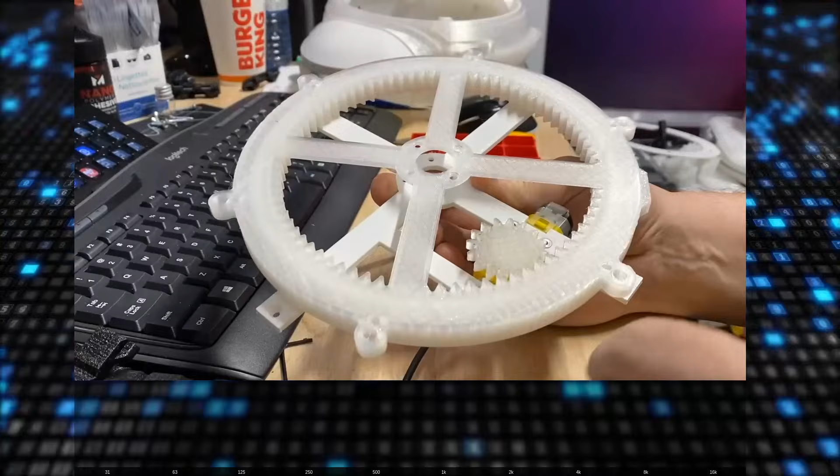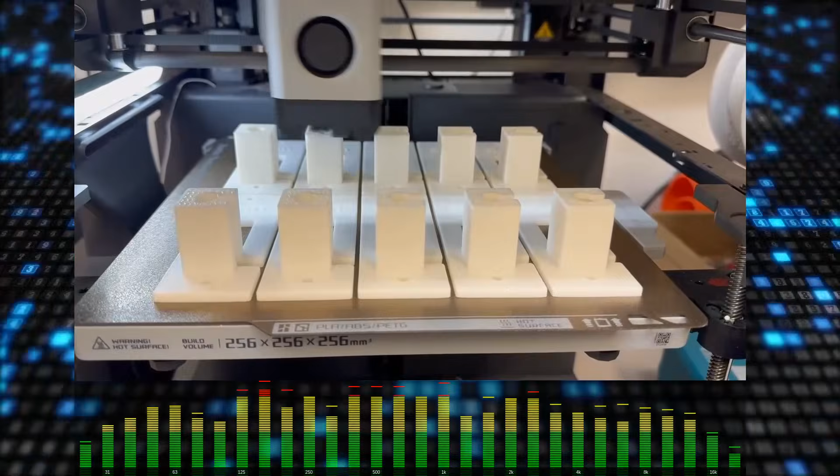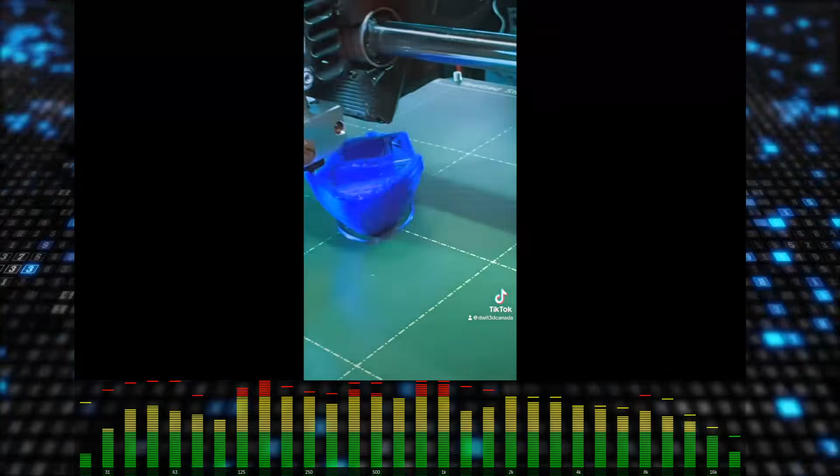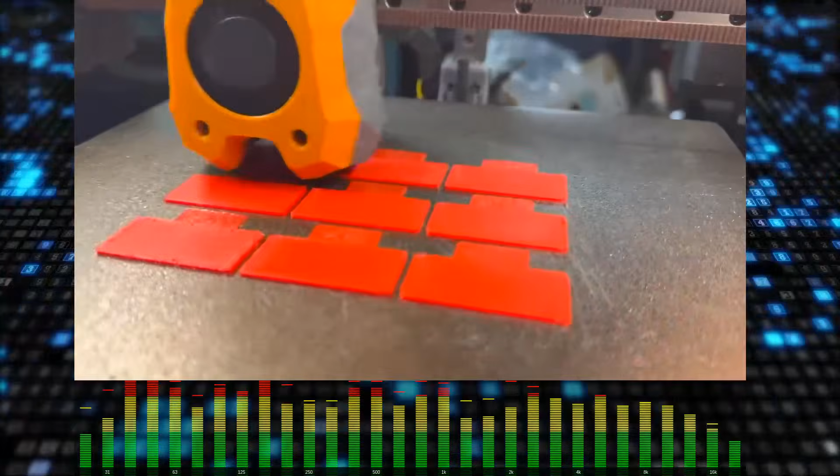Flip the switch, light the fire, ideas spinning higher, higher. Testing melting shapes take form. Welcome to the stream, doing 3D and laser dream. Cut it, carve it, build the same. Welcome to the stream. Lines of code, sparks that fly, layers stacking, reaching sky. Mistakes happen, we don't cry. We learn, we teach, we play together every day. Welcome to the stream, doing 3D and laser dream. Cut it, carve it, build the same. Welcome to the stream. What will we make today? What will the lasers say? Engraving shadows bright, crafting through the welcome to the stream, doing 3D and laser dream. Cut it, carve it, build the same. Welcome to the

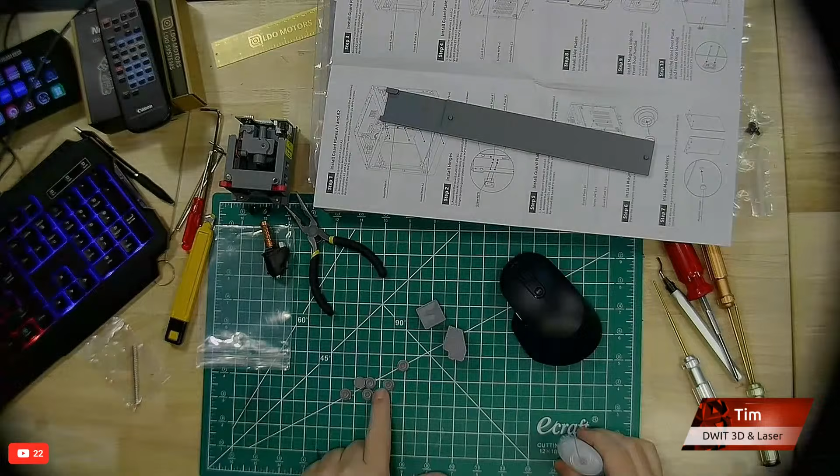Here, I'll show. Is my overhead camera working here? That one. Yeah, my overhead camera is working here. Something's actually working for a change. Look at that. So it's these little pieces here that we're going to be gluing some pieces into, and then these ones go into the panels. So we'll work on that a little bit here.

As I say, we're just going to continue and finish off the enclosure for the Adventurer 5M, and then we'll also put the hot end back on that we had fixed on Wednesday. We had a clogged hot end - we'll put that back on, put the nozzle back in, and we'll run some filament through and get this thing up and fired up.

So that's tonight. If it's not your cup of tea, I apologize, but being Canadian, I'm sorry. But that's what we're going to do because you know what? It's my stream. Yes, my stream. I can do what I want.

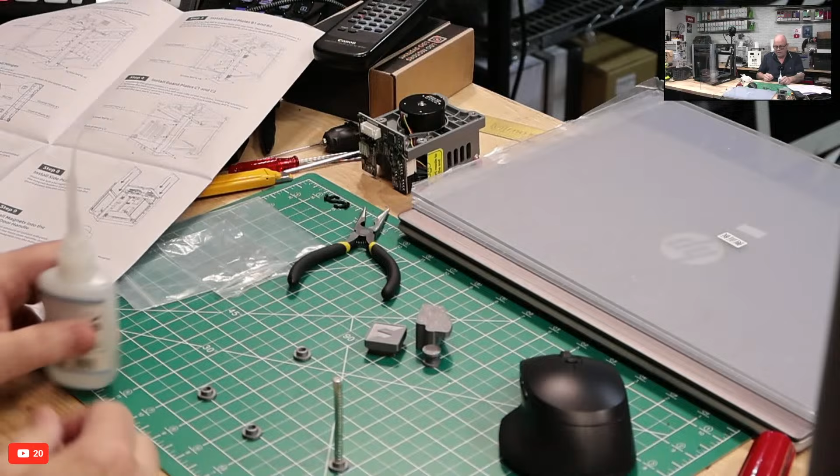This stuff just temporarily makes your fingerprints disappear too.

And then we'll use the desk, and we'll push that one in. And that's stuck to my finger again. There we go, there's 4 out of 6 done. I still have a little glue on my fingers, but a little bit of CA glue never hurt anybody.

I think what I'll do is just a little bit of glue in there for this one. There we go, and a little bit in there for that one. Oh, way too much, I just dripped all the glue. That's all right.

Come on. Okay, this one we're going to be quick with, because this is going to get all over my skin. Get off of my skin. Come here, come here, come here. Turn around, get in there, and get off of my skin.

There we go, and I'm going to pick this one up with a cloth and wipe the excess glue off of this. There we go, look at that, we got it. One more magnet to place.

They sure do give you a lot of extra magnets. And one more.

And we'll turn it over and pop it in, pop it in all the way, and get the fingers off of it so it doesn't stick. Oh, yeah, see, this stuff is so liquidy, it gets everywhere.

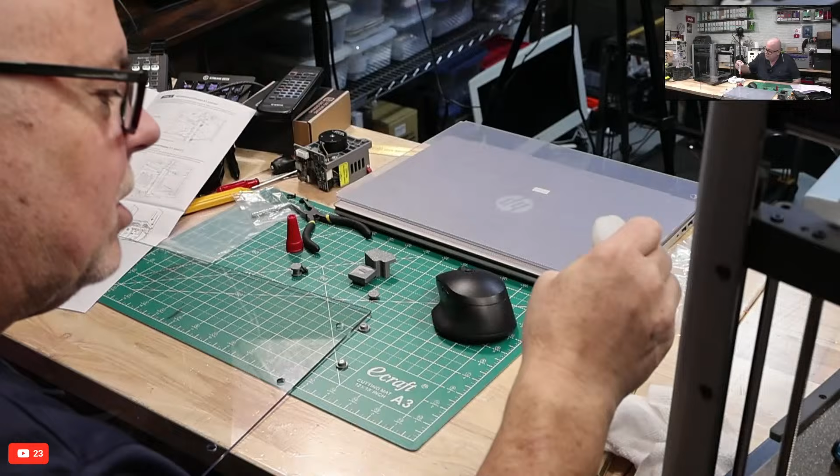And then I will get this glue flowing. Make sure we're flowing - we are flowing. I'm just going to put a little bit like that. I don't want this to... okay, a little bit overflowed on this one, so I can wipe that off before it dries. Not a big deal, there we go.

Yeah, darn, I messed that up a little bit. Oh well, I'll put that on the far side of the printer where I don't see it. I got a little bit of glue on this thing here and it kind of fogs it up a bit. So no big deal, no big deal.

So this time I want to be very careful. I need a finer tip nozzle for this glue bottle, to be honest. Just a dab, that's all I need. And then pop that in the hole - that's all it needs. That's better, that one's better.

Plus, if I ever wanted to, I know a guy that can cut me some more acrylic. I know a guy that knows a guy, nudge nudge, wink wink, in the sign business. I'm easily able to get more acrylic. Pop this one in, there we go. So we'll let those ones dry themselves out, and then we'll grab this one and do the same thing with it.

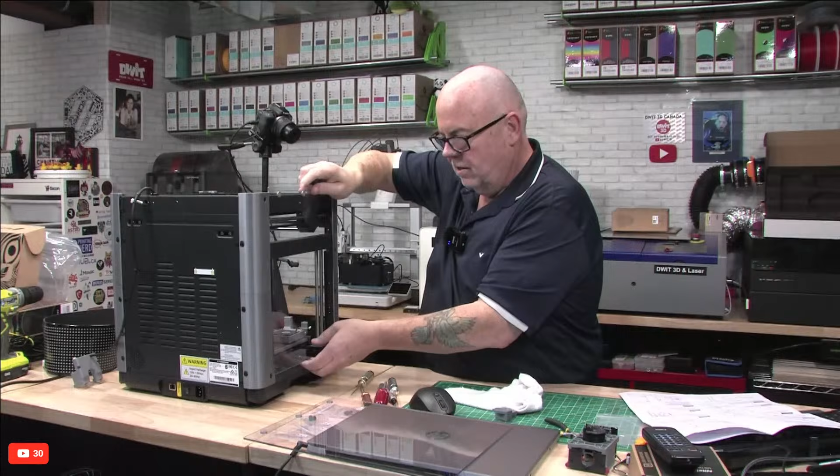Okay, we'll turn this around. And so this basically just, oh that's ugly, oh man that's ugly, what have I done. This basically just slides in here, slides in these little grooves here. And there, that's one side on right there. You can see the ugliness I did right here. We won't show it any closer.

Okay, before I go too far, I am going to put the hot end back on. So let's get this camera all set up here for the right view. There we are. Whoa, got a hole in the ground here.

I got to print a cover for that yet. So I don't quite remember, it was last week I took this hot end off. I don't remember exactly how it went back on, but we're gonna wing it and figure it out. Oh, that acetone rag stinks, let's put you over out of the way.

Okay. We know it goes on this way, but we got to put the wire in first. Is this thing zoomed out enough to show you guys what I'm doing here? Right there, let's see, let's go like this. There you go. Okay, so this guy with the yellow sticker goes on like this. But we got to plug in the umbilical like that. This guy goes on sort of like that and like that.

And I know this comes around front. No, the umbilical doesn't go under there. No, I'm upside down, what am I doing. I'm upside down, this guy comes around like this. Although I have a feeling this top part comes off again anyways.

That's okay, so we're going to pop the hot end on, we're going to put the screws back in. I don't think that has to come off, let me just double check. I don't think that has to come off the whole, oh, just whatever.

Boom, boom, boom. I just want to make sure the hot end doesn't have to come off in order to remove the front cover top extruder cable. Okay, no, the hot end itself does not have to come off to put the drag chain, but the top cover of the hot end that I just put on does have to come off. So I am going to remove that top cover right now.

And I'm going to unplug that. Come on. There we go, and we'll just put the hot end itself back on. Now, if I recall, it was these two screws from behind.

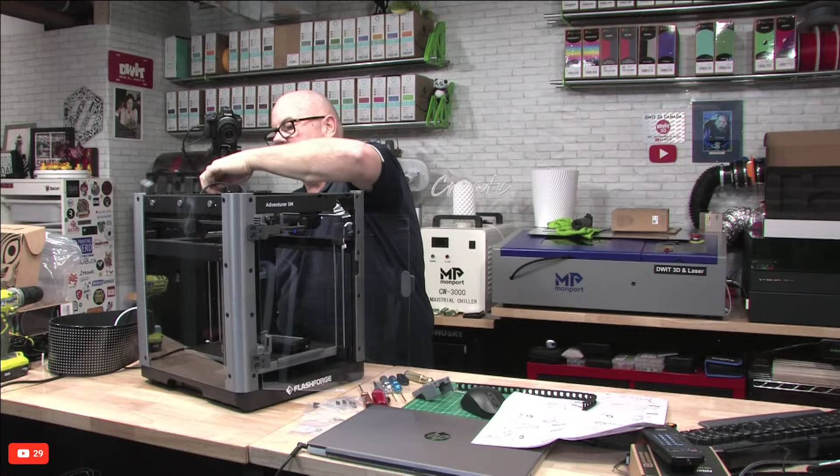Oh, I see, there's the plug for the runout sensor. This is going to go on here, and it's going to be screwed into the top with two screws, and then into the side there. Oh, there's two screw holes here. So if you look on the back, they've actually got this thing ready for an enclosure.

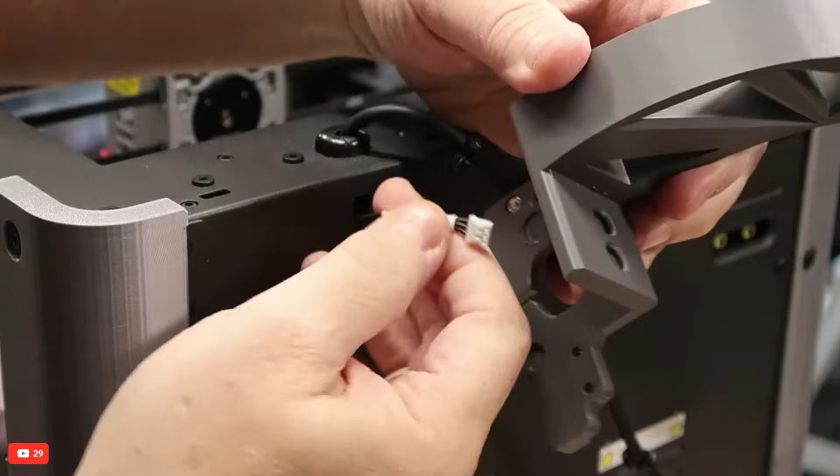So what I need to do in this case, let me get rid of these little clips. Oh no, that's for the PTFE tube, let's leave those on. So we got to plug the filament sensor back in, which is going to be a little tight fit here. So this is going to go in here.

Come on. Oh, that's tight. Let me get some tweezers. It's just a little too tight for my little fingers. Actually, I can probably use these needle nose pliers. Here, let me zoom this out a little bit here. There we go. This is just a little awkward, that's all.

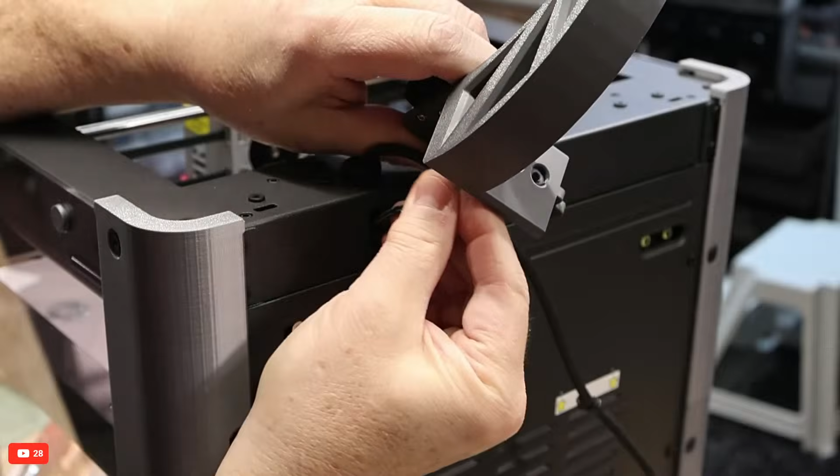Because I got to fit this little plug into this little hole right here. So we'll get it, we always get our plugs in. Oh man, that is just super tight. I wonder if that's not just too close to the... yeah, that is very close.

Okay, I gotta take, if you look where the wires are going, that's hard to see. I'll have to show it up here. I have to pop this off because there's some plastic I got to cut away. Otherwise the plug's not going to be able to fit down there because the one pin is really tight to the plastic in here, and it's hard to kind of show on here. You can kind of see inside. No, you can't really, forget it. You have to take my word for it.

We're going to undo this, we'll just pop this off, and then we got to cut a little bit of plastic away on that far side in order for this to work. Okay. So let's not lose the bolts, they're both in there, okay. So I just need to cut some plastic on that side away.

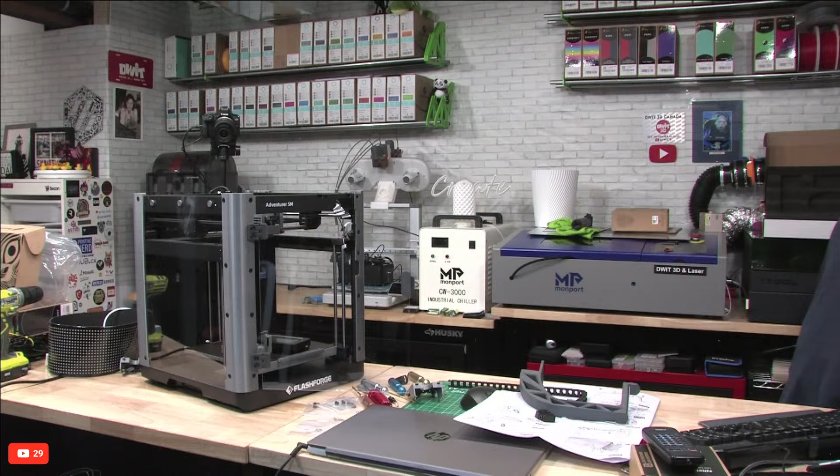Let's see if I can do that with just my knife here, pulling it towards my chest. Actually, what I'm going to be better off doing is grabbing this little guy. There we go, that should be good. Let's just clean it up a little bit.

I know I hit my mic with that, sorry. Okay, and let's just double check. So this is going to come through here like so, and like that. Oh yeah, good, I got plenty of room there now. Okay, so let's put this back on.

This is just a filament runout sensor. Okay, we'll throw that back in there. We'll double check that spacing for the plug. Yeah, that's much better. I wish I could somehow show you what I'm talking about.

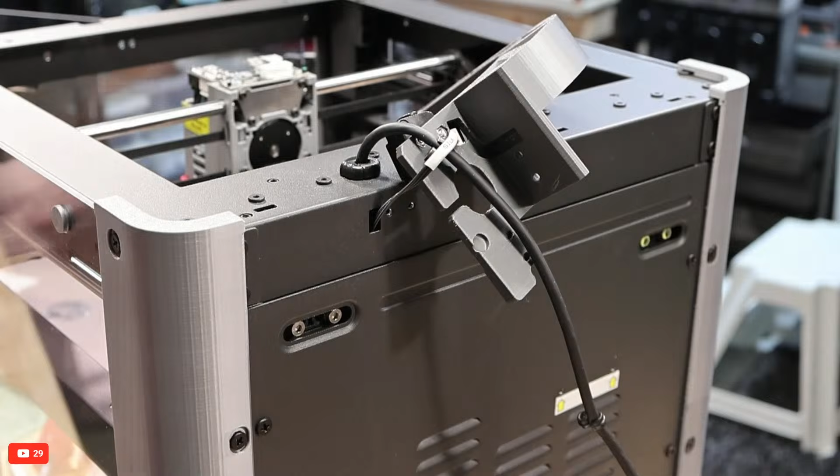Where was the plug? Right here. Okay, so let's go ahead and get that in now. And just like that, it's in. It is in there. I'm just going to grab my little tool. No comments, just make sure that is pushed in all the way. So now we're in, and then now, this guy has got to go around this wire.

Why is there another hole there? I don't know what that one's for. I wonder if this wire's got to go in like so. These sensors got to go down that channel.

And this is going to sit in there. Oh, there's a little channel for this filament sensor wire to run down, and it's very fussy. There we go, so that goes in there just like that. Now is that going to stay there for me for a minute? It is. So we got that in there.

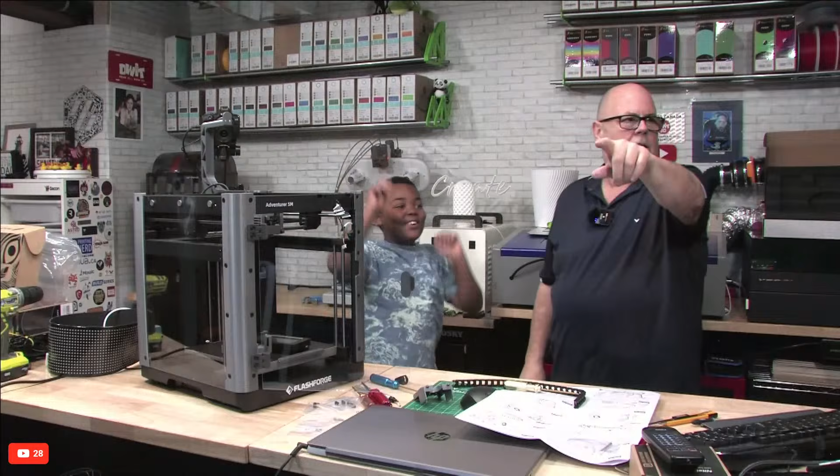I got to switch to the bigger camera because we have somebody here to say hi. Hello, no, in here, get over closer here. There's the camera right there. This is Ethan, guys, for anybody that doesn't know, this is Ethan.

Not interested in 3D printing at all, really, but he comes down, he supports the channel, he supports the YouTube channel. So, look in the camera and say everybody watching it better be subscribed. You already said it though. Well, say it again, coming from you that might mean more. It already means more. See, look, hello Ethan, Ethan, hello, hello. Dominic, see, everybody's saying hi to you. So there we go, hello everyone.

No school tomorrow. No school tomorrow. How come? Our Christmas break. Oh, fall something break, yeah. Fall break.

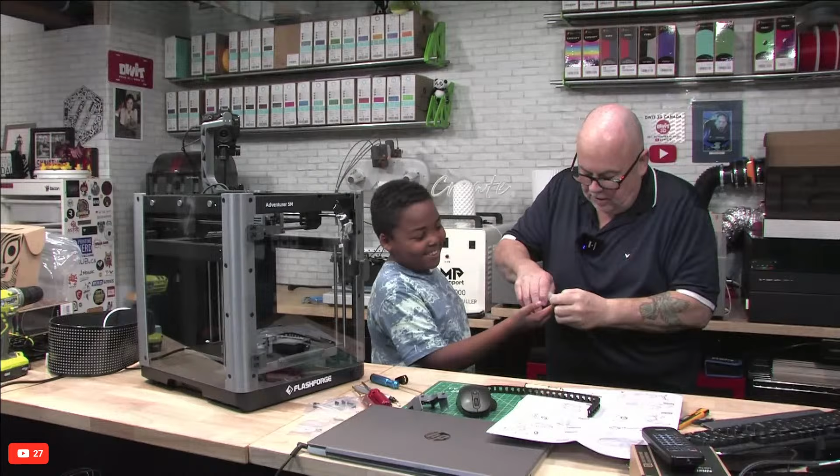Here, give me your fingers for a minute here. Okay, sure, give me your fingers. Okay, I'm going to put a drop of something on there and then I want you to stick it to your nose, okay? Just pretend. Okay. So we'll put just a little bit here. Okay, now stick that right to your nose. Hold it there for a second. And then pretend you can't pull it away. And try and pull it away. Dad. Oh, really? Dad, okay, go show Mom what I did. Okay, Dad. Thanks, everybody. Okay. Dad. What? Why? Why what? I thought that was something else. No, because it was funny. Glue, I didn't think that was glue. Oh, go, Mom might help you get that off. Get away now, go, bye.

It was a prank, by the way. Oh, don't. What? Ah, I'm pretty sure they know I wouldn't do that.

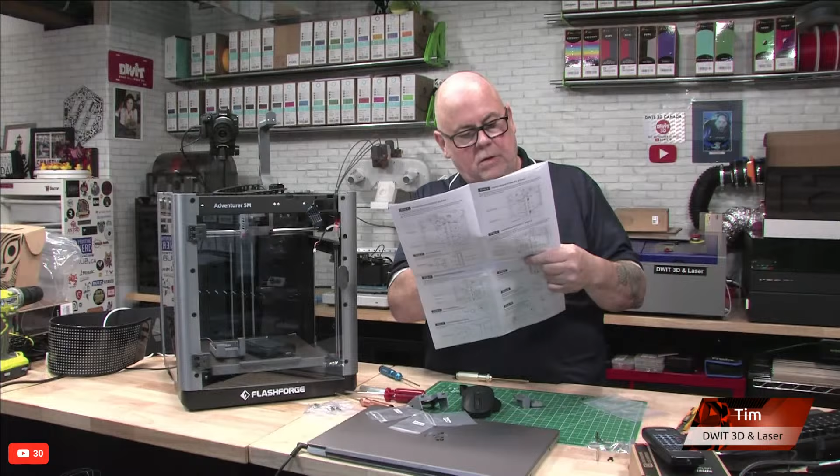Okay. We have that under there. Just have to read this a little more carefully. So we have extruder cable, it's coming up through the top, which it is. We have that coming up through there. We have item number 3, filament guide tube. Okay, so we haven't got the filament guide tube on yet, so we're going to put that on, which is this guy right here. Okay, so the filament guide tube is going into here.

Okay, that's in. And then we're going to have our drag chain. So this drag chain is going to have to go this, which way? The opening is out towards the back. So this is going to come in here. But we are missing one piece, it looks like, here for the drag chain. Or do I just have this backwards?

I need the drag chain cover. I'm missing a piece, is this the one? Oh, I see, okay. It has built-in supports, that's why this didn't look like that other piece. So I need to pop out these holes, these supports, like so. Ah, I didn't see those. There we go. Built-in supports were hiding on me. Okay, so this is the piece I need.

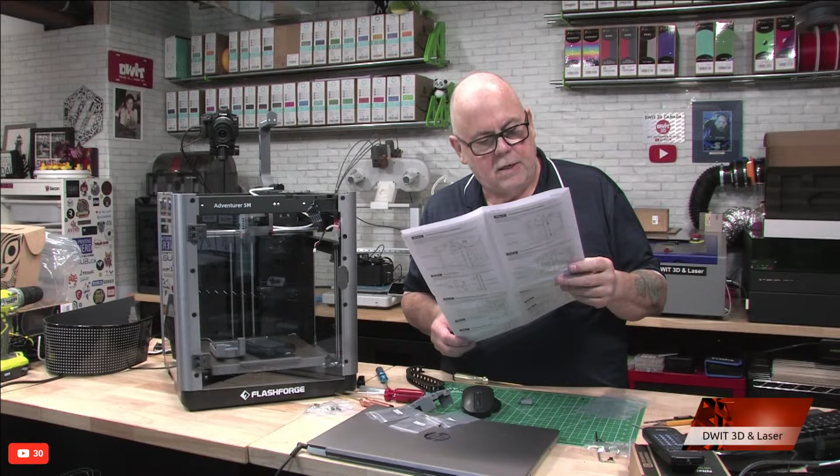What's holding the drag chain in though? That's what I want to know. Is there a pin that I'm missing here? Hang on a second. So basically what I'm trying to find out is there's an extra hole here for something. I don't quite know what that's for, but that's something to do with the drag chain going in.

Okay, was there another hidden... no. I'm just trying to figure out how this thing is actually working. Oh, I see, maybe that clips into that. I get it. Okay, and then that drag chain clips into this. Okay, I get it now. That's why I've got to get the cables through first. Okay, so it makes sense now, I just had to look at it for a little bit longer.

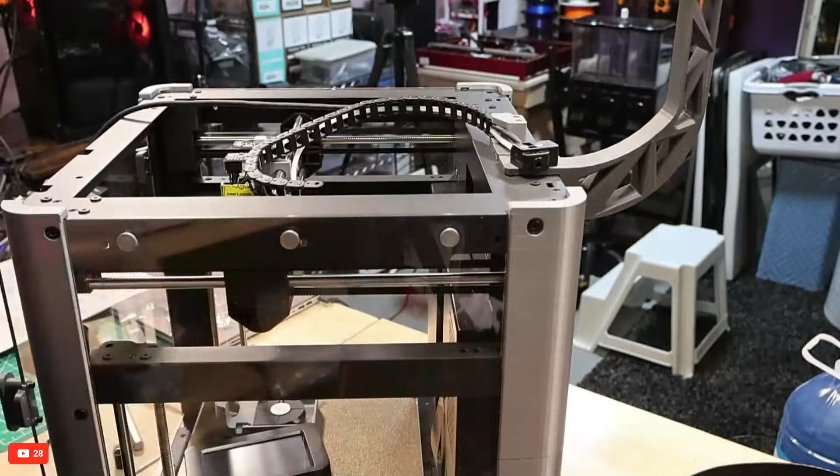So from the front, if I turn this around for you, from the front you can kind of see right in there. And if I zoom this in, you can kind of see how that's working now. So the filament's going to come off the spool, come into the filament sensor, and then the drag chain clips in between these two guys here, and the cables are just sort of sitting in there nicely like this so that this thing can go which way it needs to go.

I think that's brilliant. Okay, so we got that part done. There we go. Howdy ho, Kenneth Davis.

Okay, so now that I see the way it's together, it's like, okay, that was pretty much common sense the way that worked. So now we'll continue putting the PTFE tube in, and we'll continue putting the umbilical in.

Oh, yikes. That is tight, I know. You don't have to say it. That is very tight though. You don't have to say it. There we go.

Oh, come on. Get in that little gap. Come on, just a little bit more. There we go. And we're in. We are in.

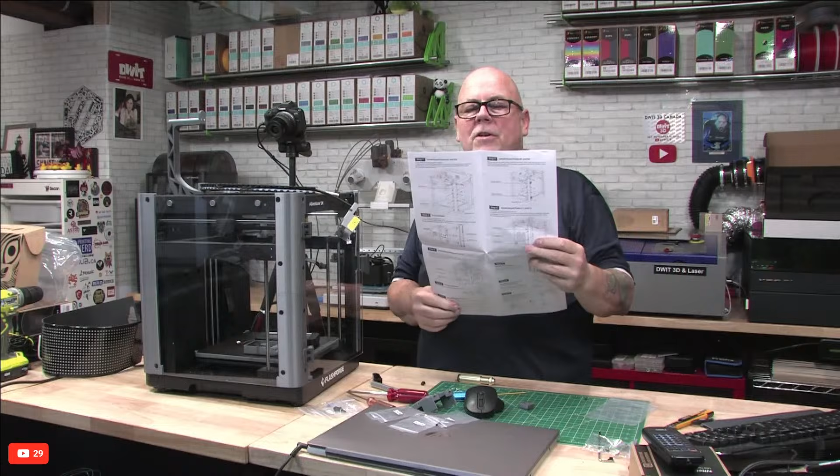Okay, next step. That was step 12. Step 13: remove the front cover, top cover, extruder cable. Pull the extruder cable out of the extruder board, being sure to pull out the terminal. Okay, we got all this out. We did all that.

Step 14: install the drag chain clip. Okay, so we have this clip, this is what they're talking about. Install the drag chain clip. So we're going to take... oh, do I have to take this thing right out? Is that what I got to do? I think we're going to replace this entire cover, if I'm not mistaken, with this one.

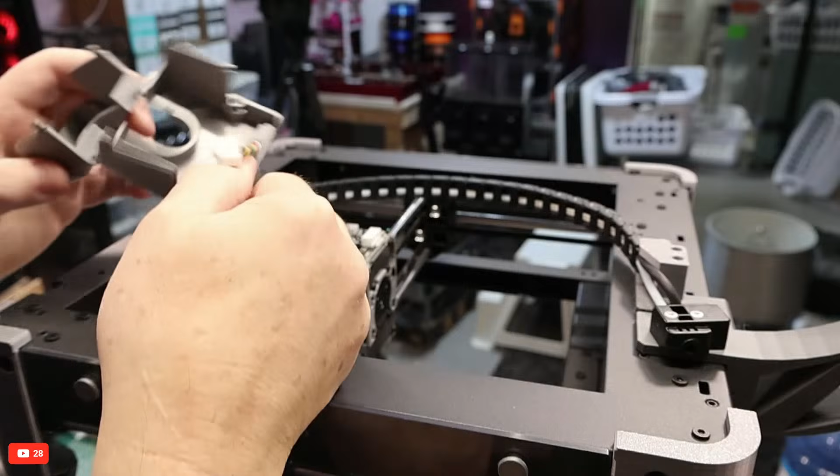Yeah, that's what it looks like. So I've got to undo these two things up here. Yes, so we want to take these out. Take this out. And this. Come on.

If you hear noise upstairs, that's just Maria vacuuming. She's starting the Christmas decorating already.

And this wire out, there we go. So we wanted that wire out. We want those wires to be coming up through the drag chain clip. Don't know if that's going to fit in there. It should. We want that coming up through here, like so.

Oh no, wrong way, wrong way. They call me wrong way Charlie. No, okay, hang on, that goes this way, up through here, like that. And the PTFE tube, I don't think has to come up through here.

It doesn't say. Thread the extruder cable out of the drag chain clip as shown. Just the extruder cable. Okay.

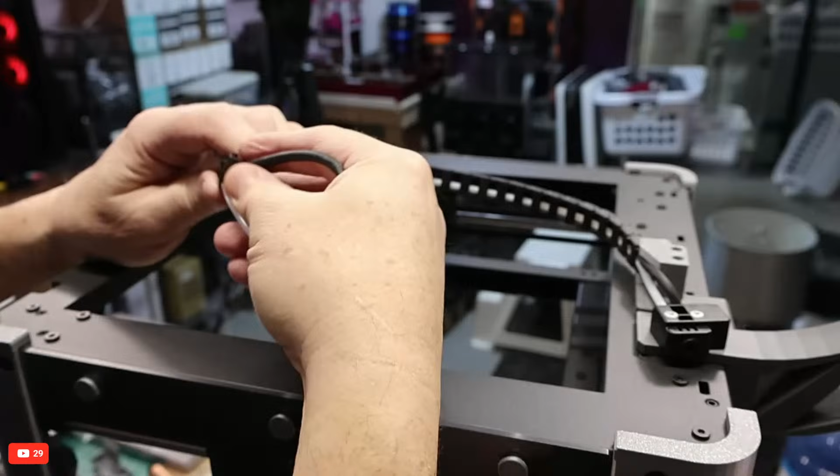We have a smoke detector going off upstairs. I'm sure the adults can handle it.

I think the PTFE tube's got to come through here as well. I think, or does it come out the bottom? Oh, it's going to come out the bottom probably. It's probably going to come out. Oh, let's just see. Let me read the instructions here a little bit. It doesn't.

Okay, the PTFE tube is coming out from the 9th section of the drag chain. Okay, so this PTFE tube doesn't go in there at all. It's going to be, actually I actually have to pull this out of here. It shouldn't have gone all the way in. It's got to come out to the 9th section: 1, 2, 3, 4, 5, 6, 7, 8, 9, something like that. So this is the only thing that goes in here.

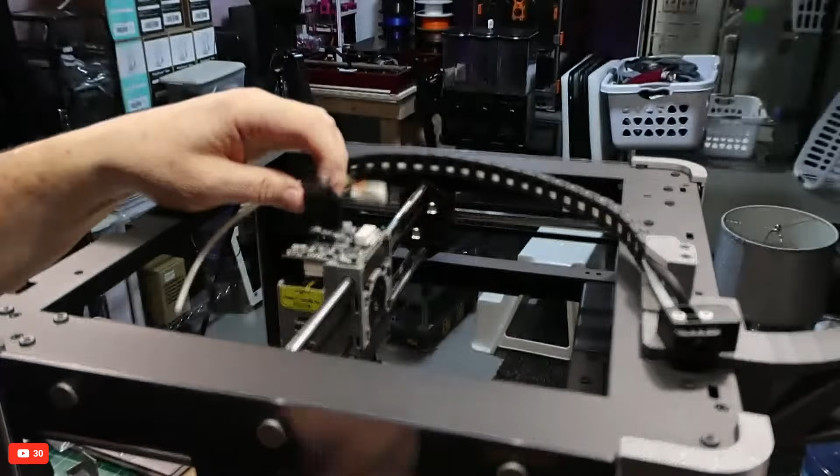Like so, and then this gets locked in to here. Clip this in. Easier done than said. Come on, don't break, don't break. Okay, so that goes in there like that. Okay, like so.

Install the extruder cable and new top cover. So the extruder cable now goes from here, and new top cover, which is this one.

So this is going to go... something doesn't make sense here. Hang on a second here. Oh, that's the old one, that's why. Okay, this is the new one.

That's going to go on top of that. This is going to go... oh sorry, let's go back over here. Let's turn this around a little better here so you can see. This is going to go... I shouldn't have put this side cover on yet because my arm's going to be in the way unless I come up from below, but you'll get the idea. This is going to go in here. Let's get rid of this cover.

You are going to plug in here. Come on. There, the umbilical plugs in there. The new top cover is going to go on here like so. Like that.

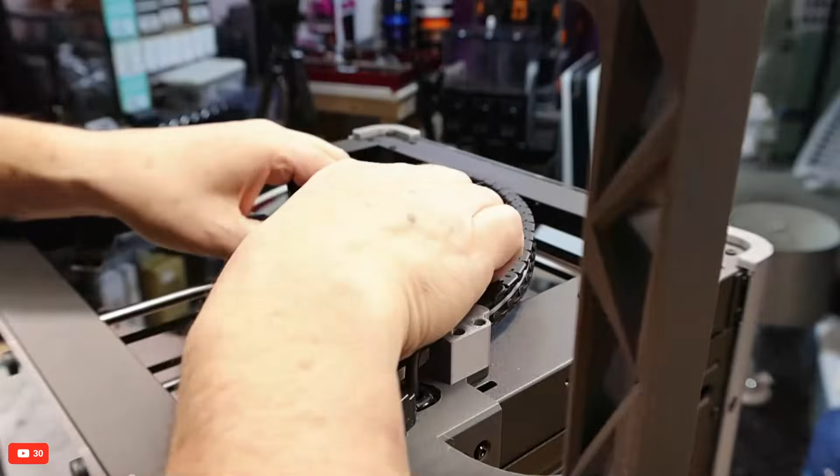Then we have to put that other squeeze-a-madoober thing on here to hold this cable like it was before. We'll just call it a McSqueezy. How about that? We'll call it a McSqueezy. This goes on here.

Come on, get in there. Like that. Okay, so basically that just goes on there, and then this guy is going to go on here, I'm sure. Let's just see.

Install the new top cover and front cover of the extruder. That's what we need these two screws inside here for. This one's going to go in here to hold the top cover on, like so. This one's going here, like so, and I'm sure there's going to be a screw holding this on, but that's not here. Oh yeah, that's here right now.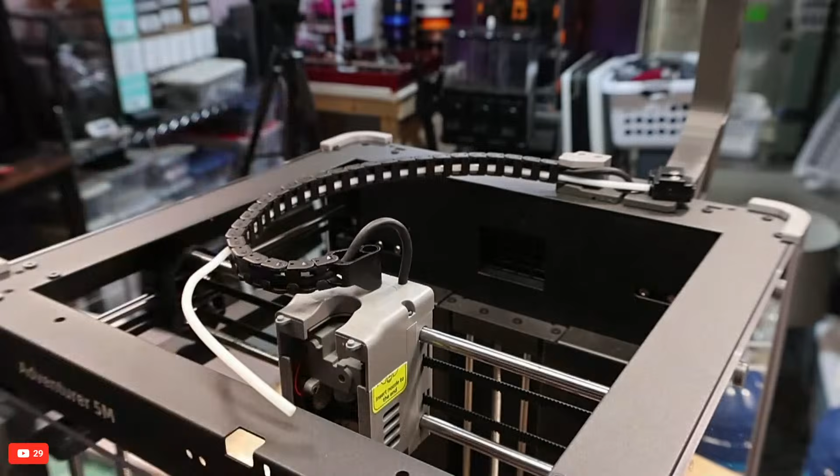But in order to separate that, I just need a little tiny screwdriver tip. Do I have one, maybe? I don't have to open that up. I thought I had a tiny screwdriver in my kit here, and I don't.

Jerry, you better be careful. You better be careful. You've been warned.

Okay, where's my tiniest tip? Don't say it. This one should work, let's see. I'm going to open the 9th one. So we have 1, 2, 3, 4, 5, 6, 7, 8, 9. This one right here.

Pop that. Come on. Pop that one off, and the bottom one, come on, separate. I can see myself cutting my hand here. Oh, here we go, there's the 9th one. And then that's got to come off of this side.

Oh, I knew that was going to happen. I knew that was going to happen. Crap. I knew that was going to happen. I knew it, look at that. I just knew it.

So we pop that off and we reverse it like so. Pop that in, pop that in. I knew that was going to happen, I called it. And I pop that in, pop that in. There we go. So basically what they're looking for is a locking point right there so that this doesn't come out any further than that. That only took a little bit of a chunk of my finger to get that right.

I'm number one. Super glue to the rescue. Ah, this is fine. Anybody who watches my channel knows that this is minor. Okay, let's put the weapon away before I do further damage.

Let's put that there. Oh, that's these clips I don't need. Put that there. I should save them, but oh crap, I have so much crap I save. What are all these spare parts for? Are these supposed to be spare parts? I guess we're not quite finished the top build yet, so we got to do the thing. Okay, so we got that done.

We reversed that clip. Step 18, install magnets into riser. Well, I guess this is gonna... when do I put the front of the... oh, I guess I should have put the front of the hot end on by now. So let's put the front of the hot end back on. Now, the only thing I'm not 100% sure I'm going to have a good time doing is getting that fan plug back in.

I need to see what we're dealing with here. So what I got to do is put in this fan, and there's this little fan plug that's got to plug in here. It's tiny and there's not much space for big fingers like me. Let me see where it's got to go.

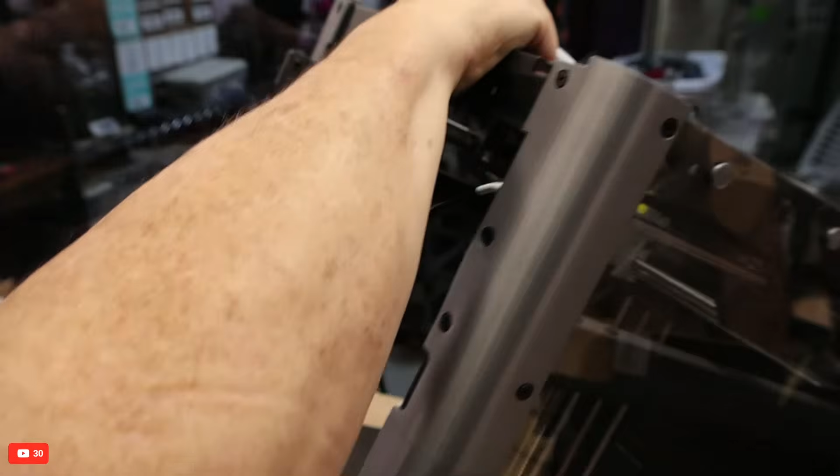Oh, there's that other M3 screw I was missing right there. Okay, so I think if I tilt this up, can I do that? Is that going to work? No, I got that in wrong, I think. Don't make that piece loose. This is right.

This is where I think I need to use some tweezers or needle nose pliers. I can't fit my fingers in there. So let me see if I can do this. Okay, don't fall on me, printer.

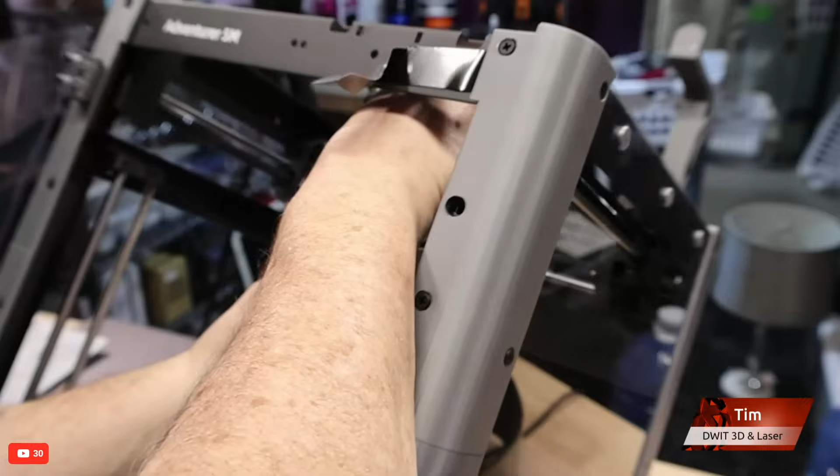Argh, that's just too small.

Okay, hang on. Yes, sir. You okay? Oh, I'm fine. Yeah, a little bit of blood, no big deal. Okay, but thank you for checking on me.

Medical grade super glue. Where's my little tweezers? I have little tweezers here somewhere. It may work, I just don't know. This is just me, this is my big hands, mind you. They don't make it real easy to get in there anyways. This is just my big hands trying to fit into a little space.

Was I going the wrong way? Let's see, maybe I was trying to put it in the wrong way. Let me see if this is maybe the way it goes. I can't really tell from this angle. Let's see if this is more suited. There we go, yeah, well, for one, I was trying to put it in the wrong way. There we go, we got it in.

And we will put that back on there. There we go, we got it. Okay, we got it, no excuses. And let's get that M3 screw out of there that we found, throw that in my little tray here. Although that had a lock washer on it, the other one I put on didn't. Doesn't matter, lock washers are overrated. Okay.

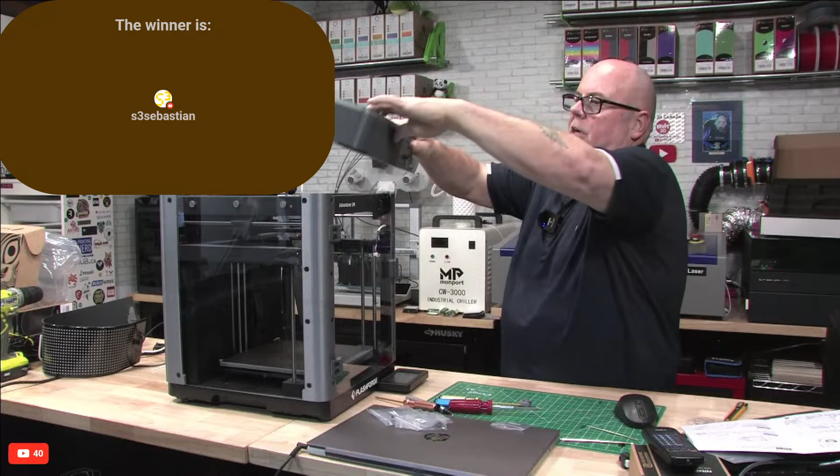There we go. Oh man, that's not sitting too flush. That's okay. Okay, I could glue that actually. It's not sitting the flushest. I'm not about to pull it apart.

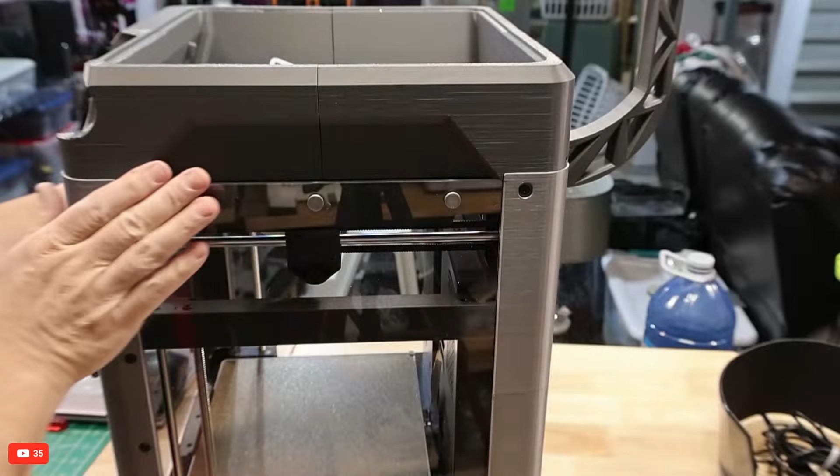If I show you here, so here we are in the front. It's a little bit dark, might not be easy to see. But we have the gap, which again, for a 3D printed homemade enclosure, it's not that big a deal. And then on the side, ow, ow, ow, ow, on the side we have a gap, okay. But that's just, it is what it is, that's kind of the nature of the beast. So I'm not going to complain about that. Okay.

It is looking good. Thanks, Jerry. Oh, you got it? Thanks. Good, Tactical, awesome, got your prize. Go ahead and claim it. Do some Polymaker stuff. Okay, what do we do next?

Install magnets into bottom of risers. Oh, I have to... oh, all these holes. Oh man, we got a boatload of holes here, a boatload of holes, if you look. We got holes, holes

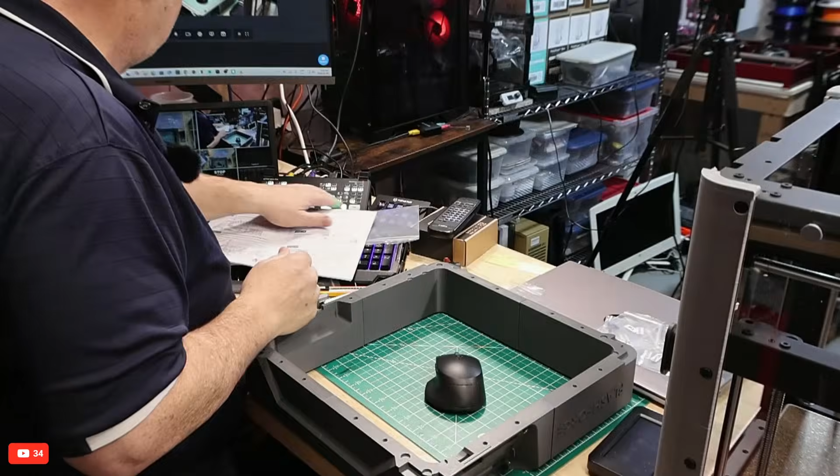for magnets. So I get to glue my fingers some more. Man, just when I thought I was done with the glue. Okay, here, let's do this one. Overhead, okay, so we'll start up here. But we've got to put magnets in all these holes. Do I have enough magnets left? I hope I do, I'm pretty sure I do. I'm sure they wouldn't short me on the magnets.

Just make an accent piece that goes in the gaps. That's a good idea, actually, that's a really good idea. We can figure something like that out.

I am going to use the liquidy stuff here. I'm just going to try and use the liquidy stuff here. Hang on, it's just... there we go. See if I can use the liquidy stuff on this. It's just that it's so... doesn't take much.

Okay, let's start with those. Let's get the excess off of here. Okay, we'll just start with these ones. And we'll just use our little tool here to pound them in. Okay.

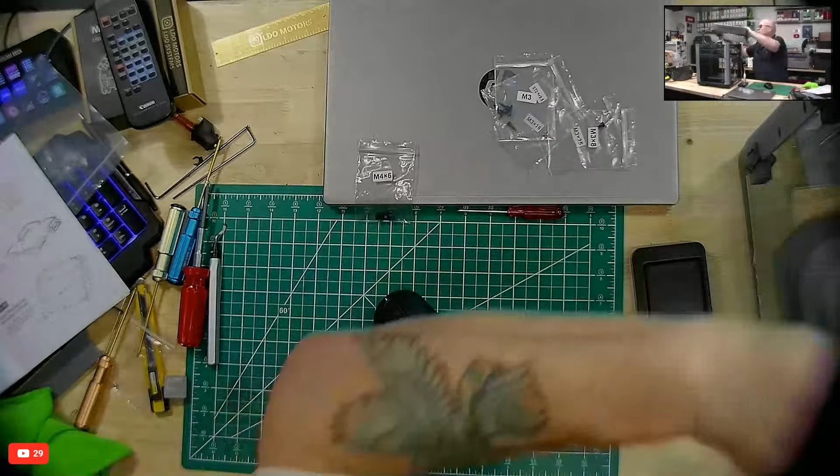Okay, so this goes on here. All the magnets are doing is holding that thing onto the top, which is fine. Did we need magnets? I don't know, but it kind of holds it onto the top. There we go, I got glue all over me. Let's put this stuff away, that is dangerous in my hands. Okay, we press fit all the magnets. That's step 20. Now we're on to step 21.

Install the top cover handle. So we have the handle, which I printed, right here, and we have the top cover, which is right here. Oh, I like the fact that they put a raised top cover on this so that the PTFE tube and the drag chain do not drag on the top cover.

I swear I got no nails. Come on, this is frustrating, folks. There, I got it. Okay let's see, I'm missing. Here we are. Super glue a set of nails, yeah. And I got this one, my thumb has a little bit of nail on it. There we go, my thumb to the rescue.

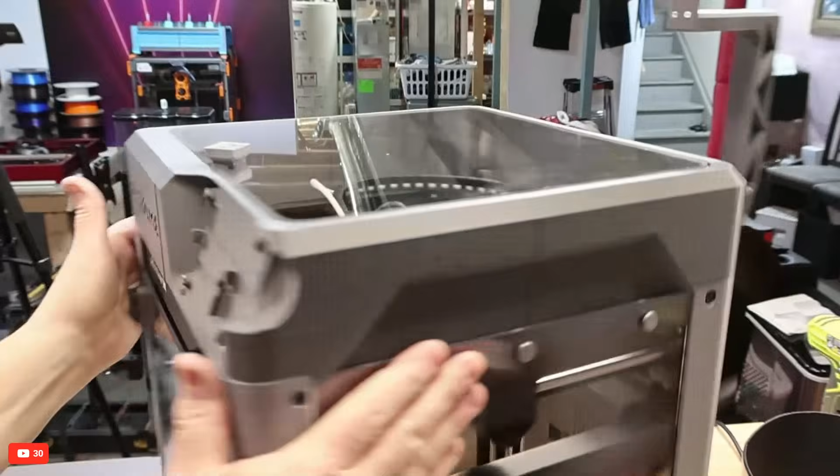So step 23, locate the screen cable. Insert the screen cable and install the screen. Note, ensure proper insertion and check alignment of the indicator line with the socket. Yes, yes, open the latch. LCD is coming forward. And insert the shielding plate between the assembly riser and the front door plate.

What? Okay, so let's go ahead and get this on. Okay, so the cable is here, cable is here, display is here, and this is going up this way. And LCD, let's just make sure we get it right. Open the latch. Latch is open. Okay, and the cable goes on the inside of the latch. This is just very tight for my hands.

Open the latch. Oh, there's not very much. If I pull that, there we go. It's very, very tight in here. Sorry, oh man. Let me bring this over because I'm standing right in the way. Not that it matters, but hey, here we are. There we are.

So this has got to go in here behind the latch. Nope. No, I think it's going to go in front of the latch. Yes, it goes in front of the latch. That goes in there. And then the latch closes down on it as you, yeah, there we go. And then okay, so we have that in place.

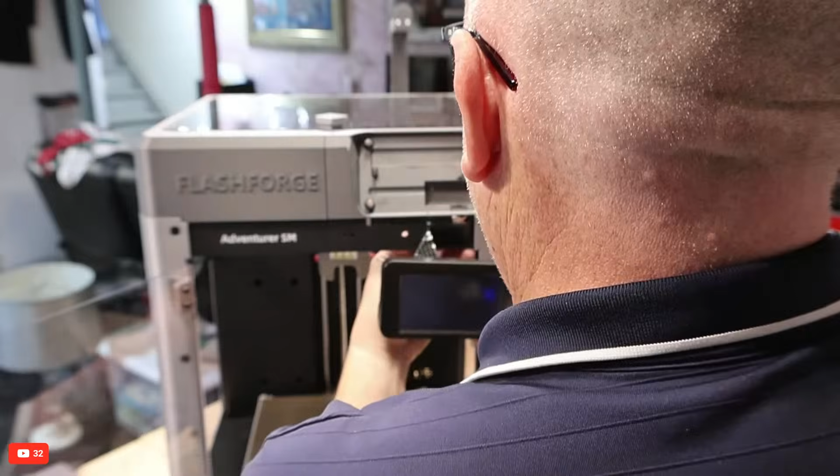And the cable for the other part, so this one must just come, I'm going to think this comes through, or does this come through? Oh, okay, hang on. So this is coming up here, this is going to go on here like this. That is going to sit up here like this. So this, I wonder if I'm supposed to reroute this up underneath so it comes out through here. I'm pretty sure I need to reroute that.

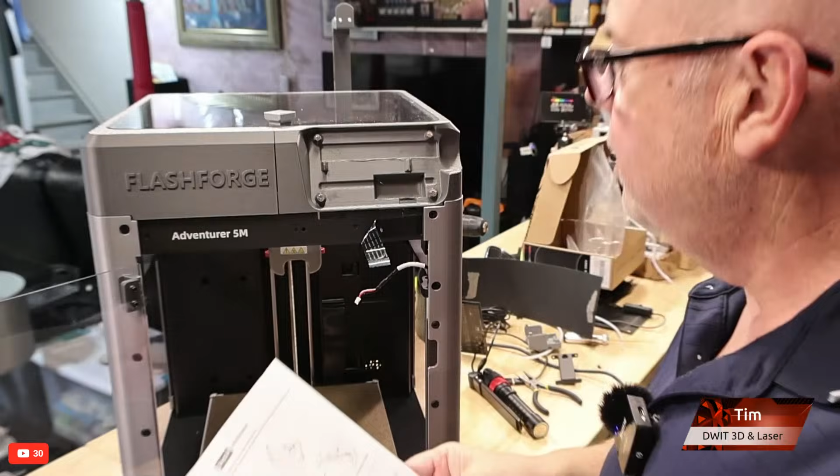Oh, don't knock the camera over. Okay, let's just see, they didn't give me too many clear instructions about that. No, it says, okay, so they say to reroute it up through here, like this. Come on. Through here. But how do I, with a bend, so I want to come up through, over this way, fold it, which way? This way. No, it's got to come up this way because of the way it's going to clip on. So that's going to be clipping on. Oh man, I don't know.

Sorry guys, I'm just... so that's that way. The clip is open, and the LCD's got to go in towards that clip. So this is going to go on this way, the LCD's got to come in this way, so it has to go up like this. Just got to make sure I have it in the right orientation so that when I plug it in, like that.

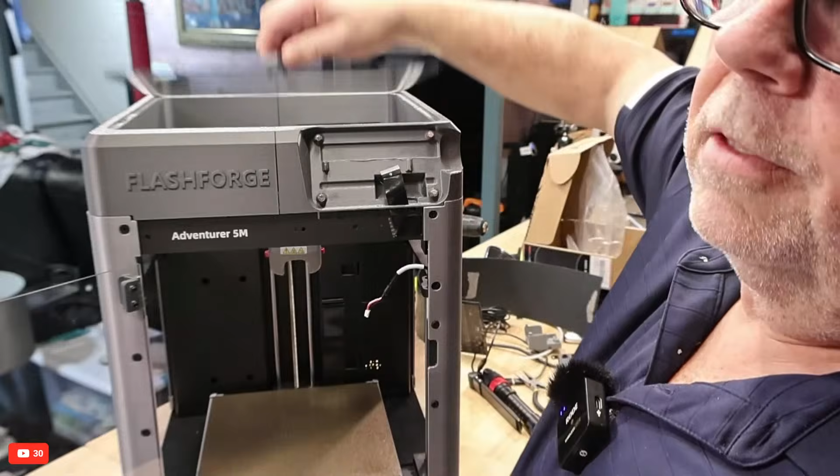Okay, and then this is going to plug in. No, hang on, bear with me. It's acrylic - I could get glass, but I just need to make sure this cable's plugging in the correct way.

Okay, so the cable's got to go in that way, that's got to go in here like this - no, you can't see what I'm doing - and that's got to close the latch. That should be right, now that one looks right.

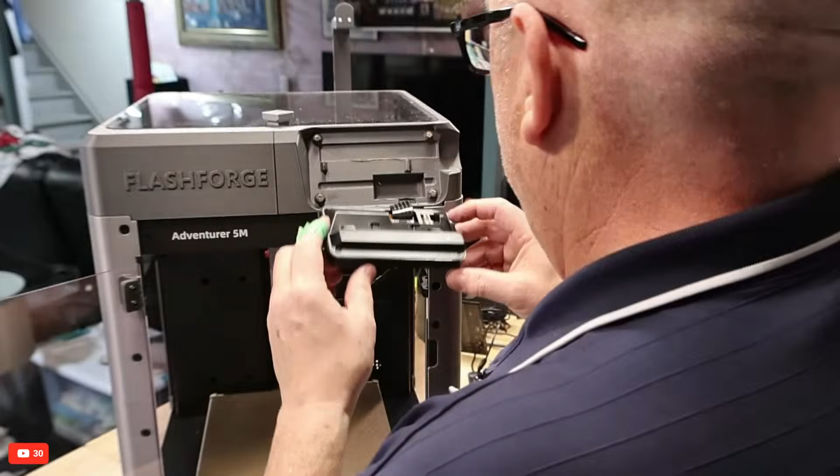Now this one is actually - that's the camera cable, and they're not telling me. They don't talk about the camera cable at all. But I imagine if I come up through here as well - actually, or will this come up through here? Hang on, come on, there's a little hole right in here. Maybe that's for the camera cable.

Right there, right there. And then that plugs in this way. Oh man, that's tight. Come on, right there. Okay, now that all sits in right there, and is held in magnetically, I assume - well, it's pretty flimsy. Or is there a little... that's what those clips were for. There we go, okay, that's on there. Okay, we got it, we got it.

Now, install the external shielding plate. Insert the shielding plate between the assembled riser and the front door plate, align with the holes and press directly. The shielding plate is right - it's that last printed piece I had, which is right here. Okay, so this one goes here, this goes here.

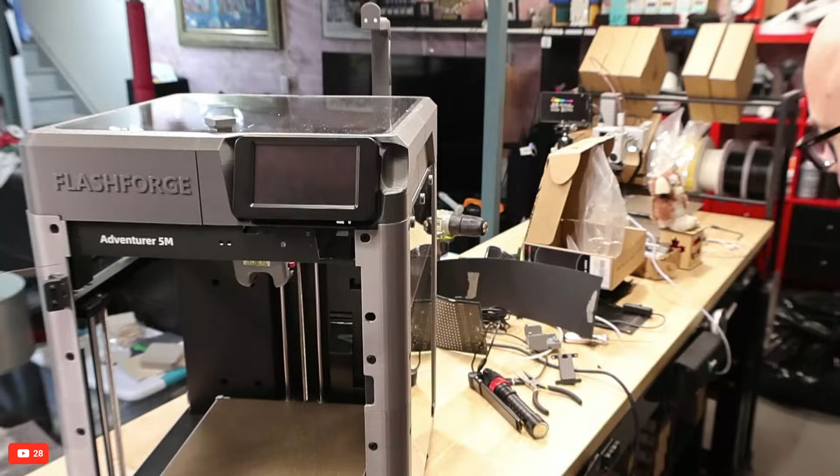Come on. That's not very... align the holes. Okay, this cable - now I want to make sure I got that cable before I go too far. I want to make sure I have that cable plugged in properly. And the only way to do that right now is plug it in and make sure that I get the screen coming on.

I'd rather do that before I get this next piece on. We'll turn this on and see - as long as I get something on my display, which I am, it means obviously I'm plugged in the right way. Always better to double check, especially because I had to bend this cable.

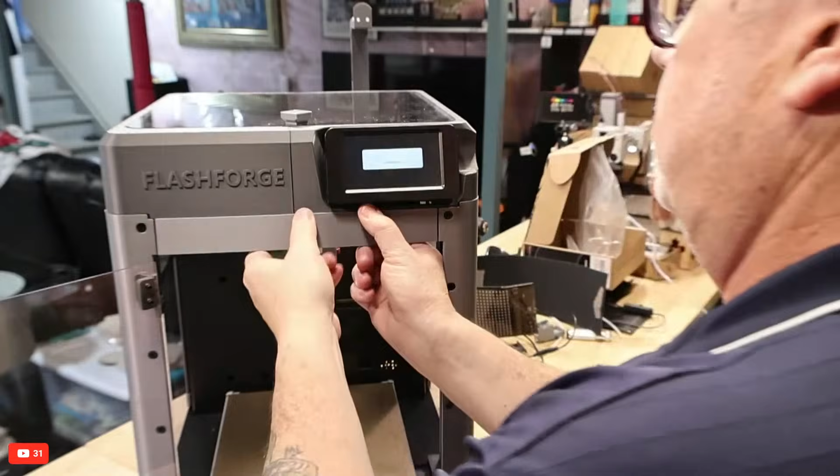There we go, okay. So now this one, they're saying just to put it on. Insert the shielding plate between the assembled riser and the front door plate, align with the holes and press directly. But pressing directly does not seem to... oh, I see, okay, that's very tight. So basically we're just pressure fitting those things in, but that does not seem to align very well.

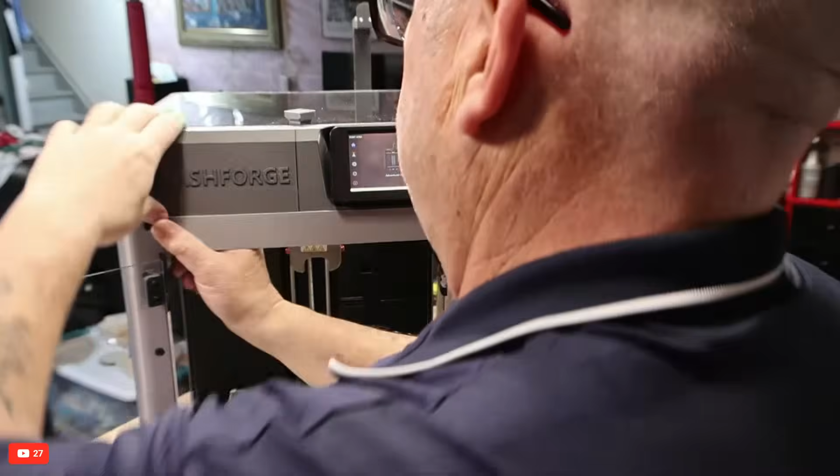Extruder temperature error. Yeah, I know, minus 67 Celsius. Why am I getting an awkward reading on my extruder? Have I got a wire mixed up? Did I not plug it in right? Who knows, I'll worry about that later.

Something's going on with my extruder. Oh well, whatever - cover's built. Come on, line it up, line up the holes. This does not want to go in there too nicely.

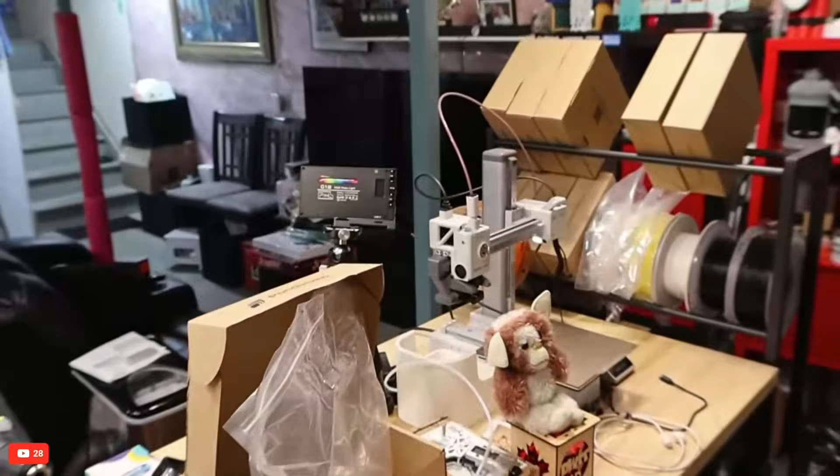This piece doesn't... no nozzle. Oh, no nozzle, duh. Thanks. Okay, I got to move this out of my way because I got to come around to this side. Come on, I should have switched cameras before I did that, but hey, what the heck. There we go, yeah, correct - nozzle would help, right?

And you can hot swap these nozzles, but let's pop a nozzle in. There we go, there we go, that works better. Put a nozzle in, the error goes away. Thanks for saying that, Dale.

Need a bigger hammer. Yeah, this piece - this front piece - I see where it's supposed to go, but it's not lining up. When I line up this one edge, the one hole goes in, no problem, but this hole on this end does not want to line up. Let me try. I don't want to break anything - that's the problem, I don't have a rubber mallet here. Let me just try real quick.

Anyways, I'll work on it. But here's what it's supposed to look like for this particular part.

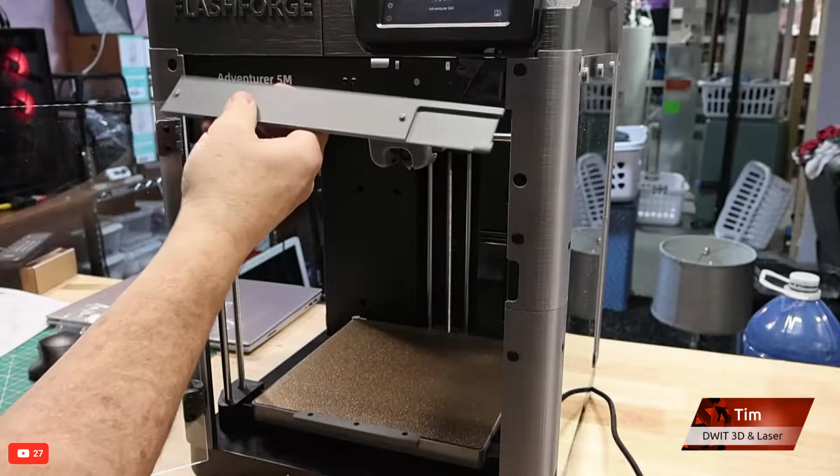Okay, this hole lines up perfectly right there. This one, nothing. And there's the two pegs we got to line up. There's a hole here and a hole here that are lining up with these two pins here, but it's not going into this one. I think this one is a little bit off.

Let me see if I can clean the plastic on this side up a little bit. It could be that I pounded it in and warped it, disoriented that plastic. Let's see if I do that, and that.

I would rather just this thing stick in with magnets, which kind of surprises me that they didn't just have this piece, put some more magnets on it and stick it on. And they didn't even put the Adventurer 5M name on that.

But I'm going to try one more thing. I'm going to get a little bit aggressive here, so you might want to cover your sensitive ears. No, I'm looking for my clamp. I have a clamp thing. I don't know where it is, but I was going to try and pinch it closed here, because it's this end that's giving me the hassle.

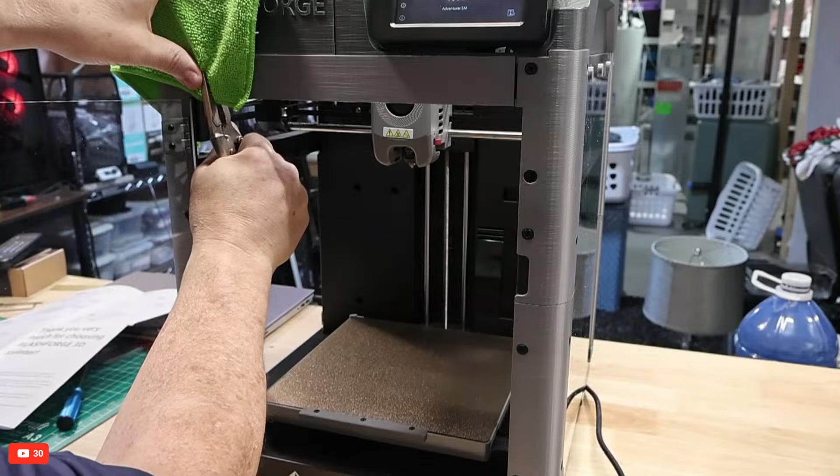We'll put a rag here, and we will... okay, make sure I'm not... there we go. That's a little better, it's in there a little snugger. I can live with that. I can live with that, just like that. I can live with that.

Vice grips to the rescue. I can live with that. But holy crap, does this acrylic ever attract dust? Look at that, we're done. We have the cover done.

We're done. Look, here's the front. Here's what the front looks like. We have a two-tone gray. There's our enclosed Flashforge AD5M. Yay!

Let's real quick here load some filament, make sure we're going to get filament loaded successfully since I fixed that hot end issue. Let's just load, here, we'll take this out of here.

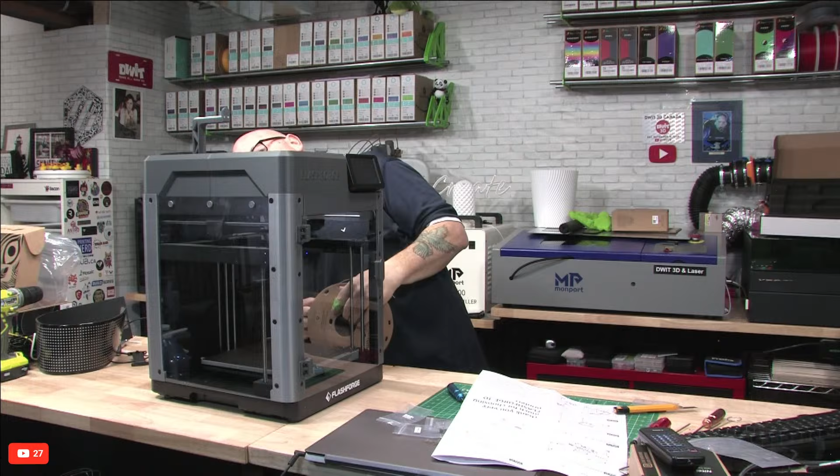We'll just load some of this Panchroma steel gray. Oh, you know what I didn't do? Oops, I didn't put the other piece of PTFE tubing. So I need to take this lid off. Oh, can't just do that because of the thing. Yeah, I can lift it here, but I need this other piece of PTFE tubing because it's got to go through this lid into the filament sensor.

So this has got to come in here. Let me switch the camera. There's a hole right here for the PTFE tube. I should have done that before I put the display on. I'm not a fan of that, because if I want to lift the cover off, I can lift it off this way, but the display is kind of tied to it. Although the display is on a magnet, if I put that down... no, that's still tied to the cover. So that's not going to work.

So let's go ahead and put the PTFE through here. Let's lift the top off, and we'll put that into the sensor. Line it up there into the filament sensor, which doesn't want to go in, of course.

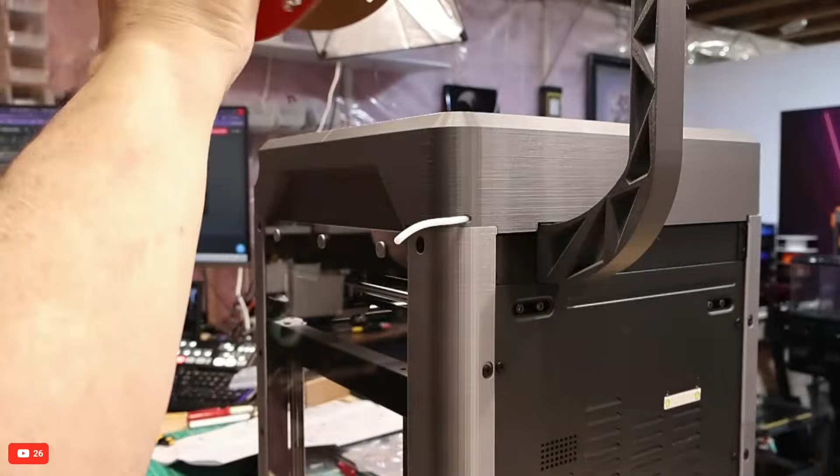Which way am I going to route this through? This way, I suppose, and then this is going to feed into here. Don't like that tight angle, but this should work though. But we're not going through. Oh, maybe this thing needs that stupid angle cut.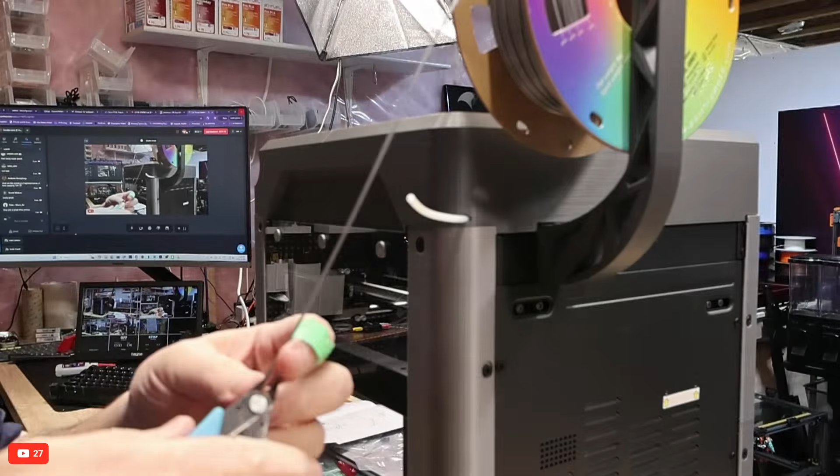Let's try this. Not going in. Not going in. More of an angle? Yeah, sure. Let the loose end of your filament go, and then blame the factory for it. Let's try this. No, we're not going in. Why are we not going in?

Well, we'll have to figure that out. Where are we at? 7 o'clock already. Ah, okay, got to figure out why the filament's not going in.

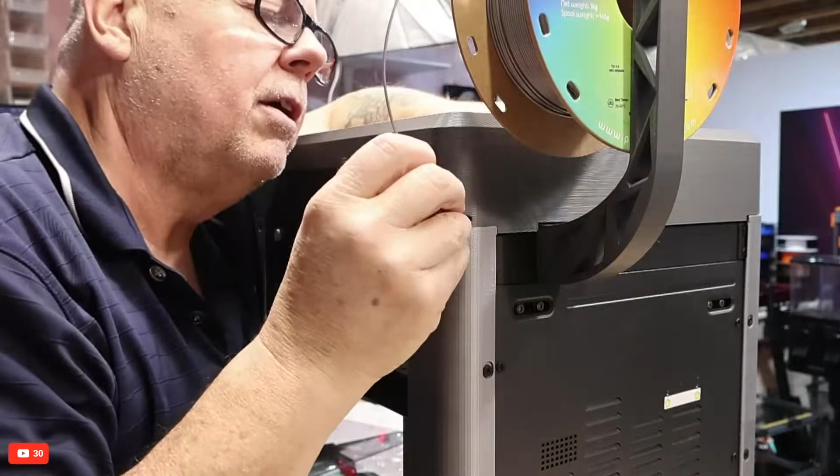Okay, we'll pop that out. Let's just see if it's this piece of tube or the other piece. Let's feed that in through here, in through the sensor. Feels like something's jammed in the filament sensor. Okay, well that's a problem I gotta have a look at.

I'm not a fan of this, that I can't just take that top right off. But let's pry this open with something right now. Let's grab a random piece of filament here and just see what's going on.

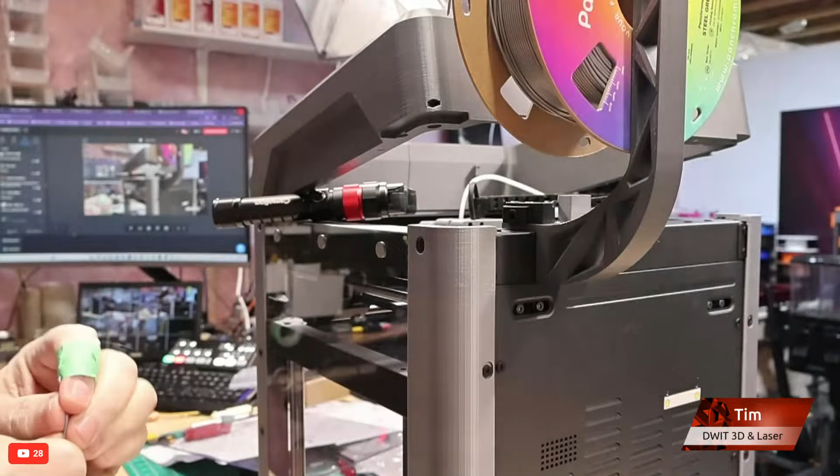Let's get rid of the other piece of PTFE tubing in here. Oh, I can see right through there. Maybe it's just a matter of getting it straight. I don't want to have to struggle with this all the time though. No, that's not going through. Something's stopping that from going into that sensor.

Dust on the acrylic is representative of time passing. No kidding, right? These are great little printers.

This is just a me issue here, I'm sure. For some reason, I'm not getting that pushed in. So if I pop this PTFE tube out, it's in here. Oh, this is not the easiest thing to work with. Let me try something here. Hang on, let me grab this guy.

There is a little sensor. Oh, do I have that in backwards? Wonder if I have this thing turned around. Because it's almost like there's a little switch that the filament's got to hit and push this way. No, I can't have it backwards, because otherwise the plug that goes into it wouldn't work with this orientation.

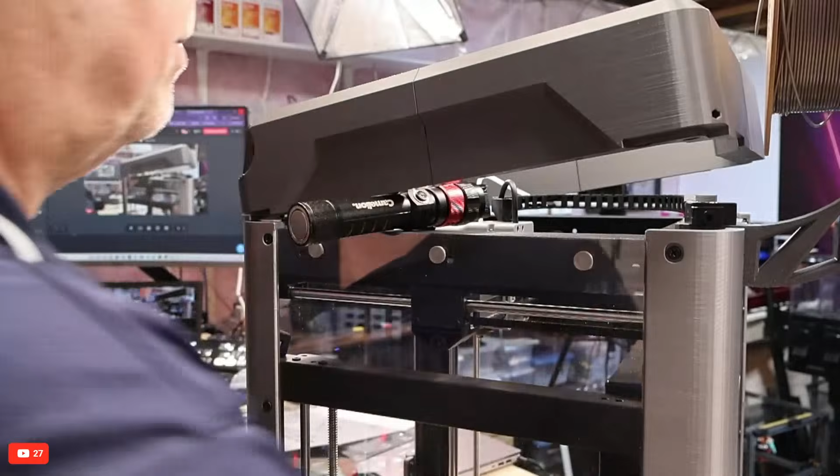Well, I'm gonna have to take this display off. First of all, let me power the printer off. I have to take the display off, unfortunately. And let's remove the LCD. Okay.

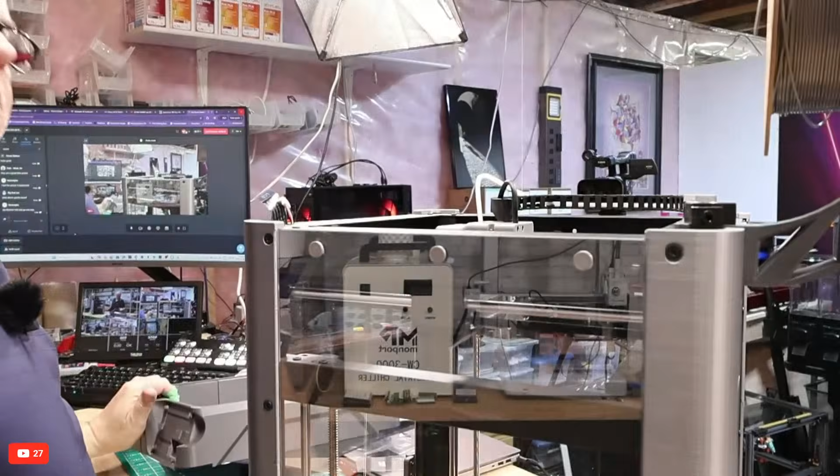That way I can lift the entire lid off. And I gotta kind of see—I don't want to run too late over time—and I want to see what's going on in here. There's something going on in here. It's almost like this is backwards, but it can't be backwards, otherwise it wouldn't have plugged in properly to this. Because I can see there's something obstructing the path. So...

If I could get this PTFE tube off... there we go. There's definitely something. Now will filament go through the other way? If it goes through the other way, then yeah, I've got that on backwards, but that doesn't make sense. And it does—so I've got this thing on backwards. But how can that make sense with the plug? Argh.

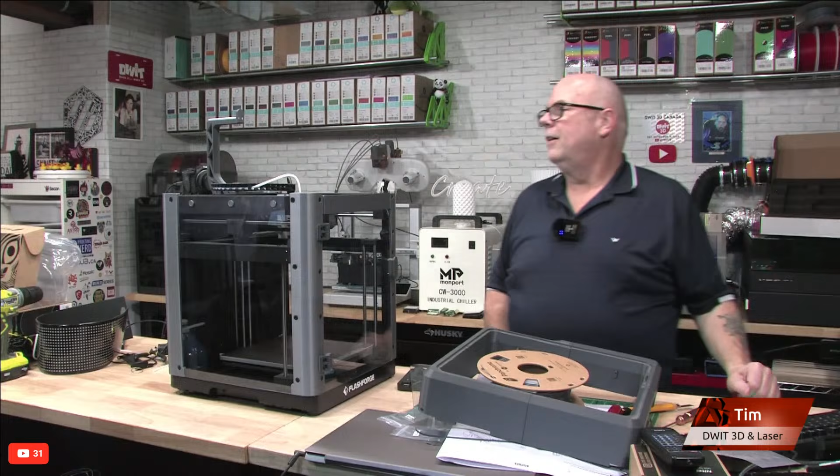Just when I thought it was all good... yeah. Upside down, no, because the plug that plugs into it comes in from underneath here.

So I've obviously, well, let's just see real quick. I should still be able to maintain those bolts and nuts on the bottom. If I take these top two off, maybe it's just a matter of taking these off and twisting it around. Let's just see.

No, because if I twist it, that's weird. Okay, I'll show you here. Let's see if I can get a good look at this. I'm not going to dwell on this too long because I've got to go eat. We have family over, so there.

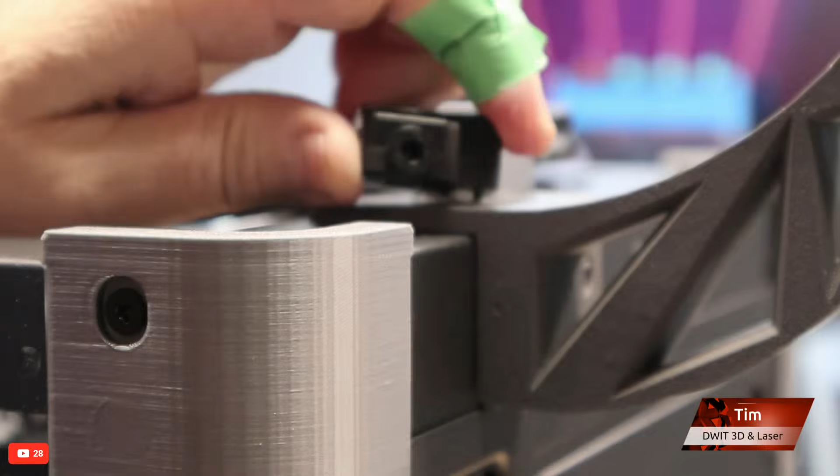So hopefully this will show. The way this is on now, if I lift it up slightly, you can see where the plug plugs into this side of it, and it comes through the opening in the spool holder itself. Now, if I take this up and twist it, because the mounting holes are here and here, that plug is over here. If I turn this, now do I have it? It's not upside down.

I'm going to have to take this whole thing apart and see what's going on. But the filament definitely has to come in through this side and out this side. So something is amiss here. I'll show you from another angle. Maybe it's me, maybe I'm doing something seriously wrong here.

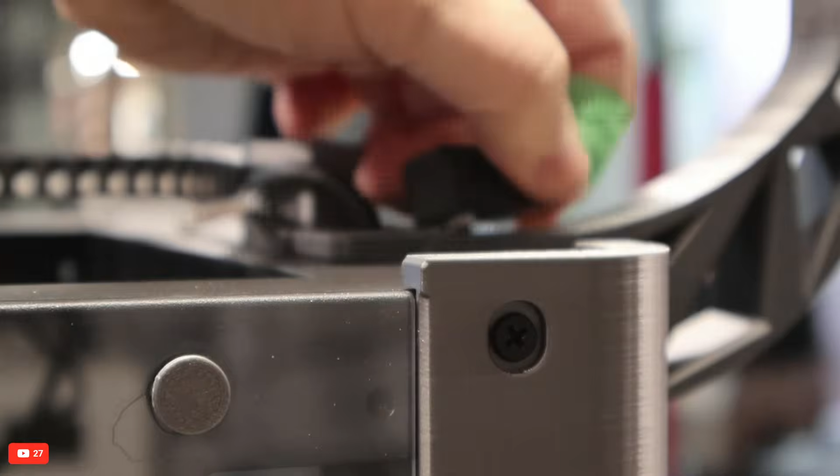But when I lift that, you can see where the plug goes into it, and the opening for the plug on the spool holder is right back here. So if I literally turn this whole thing around, that plug is going to end up over here. So I've done something wrong, or there's an error in something. But yeah, this definitely has to be that way around in order to work. But that way around, it will not connect to there properly. So something is amiss.

I'm going to have to take apart the entire thingamadoober in order to figure out what's wrong. It's assembled wrong internally, maybe, maybe, possibly. So I'll figure it out. I will figure it out. But just not right now because it's getting late.

So let me, for now, just put this back here. What did I just pop up there without this? And this, the magnets pick up every little thing. I'll just put this up here so that doesn't get damaged, and we'll work on that.

Maybe I'll do a midweek stream, but I'll take that apart off stream and look and see what's going on, and then I'll let you guys know what I find the issue being. Probably something I did, it's typical, because I did everything. I even put the filament sensor on in the right way that they said to in here, and I double checked that when I did because it only goes on one way. Yeah, it only goes on the one way.

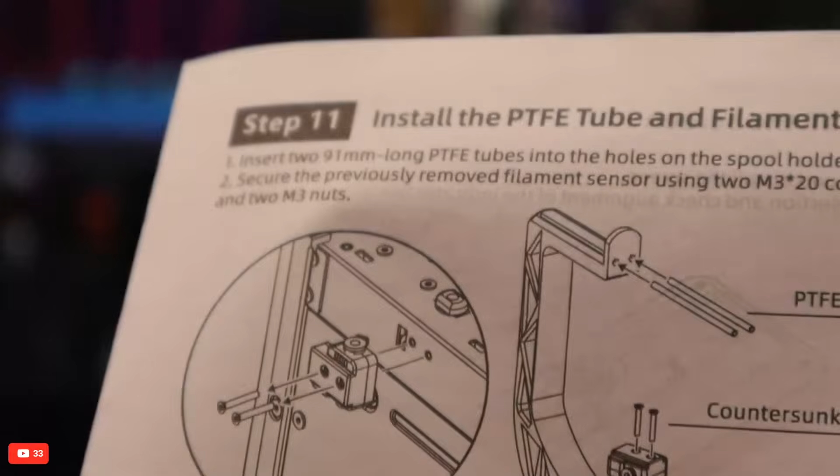With the gap, so this right here, like, not that you don't believe me, you see, this is the instruction right there, where it shows the gap for the plug. The plug goes up through that hole into the filament sensor, runout sensor, up through that hole in the bottom of the piece. So there's no other way for that to have gone on. And then right there, up through that other hole. So I can't see any other way that could have gone on. So yeah.

This is my problem. I follow directions, right?